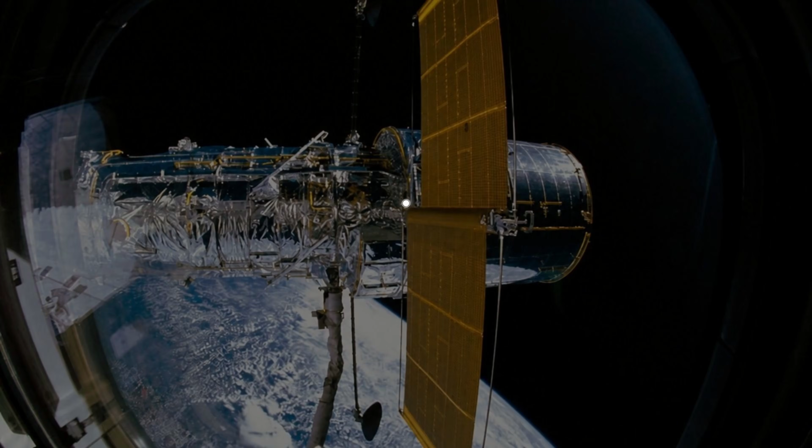In the summer of 1990, the first images came back from the Hubble Space Telescope, and they were blurred. The primary mirror underneath was one of the most precisely polished objects ever manufactured, smoothed to a fraction of a wavelength of light. It was also ground to the wrong shape, off by 2.2 micrometers at the rim, roughly a 50th the width of a human hair.

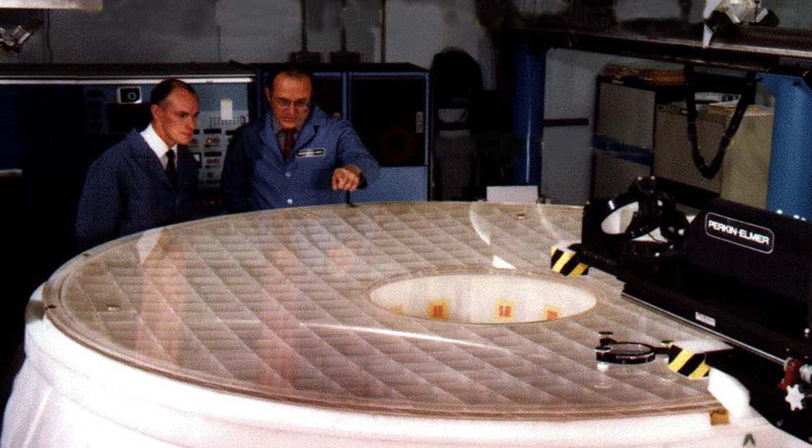But the mirror was not where the failure happened. The instrument built to verify that mirror had been assembled 1.3 millimeters out of position. Every reading it gave was wrong, and the people polishing trusted it completely.

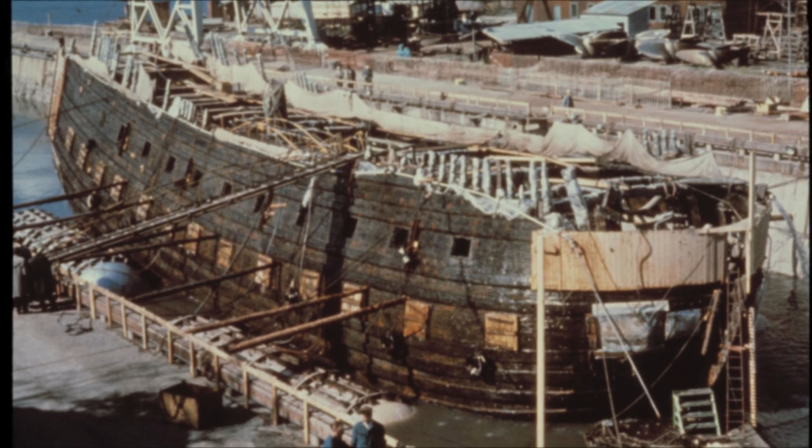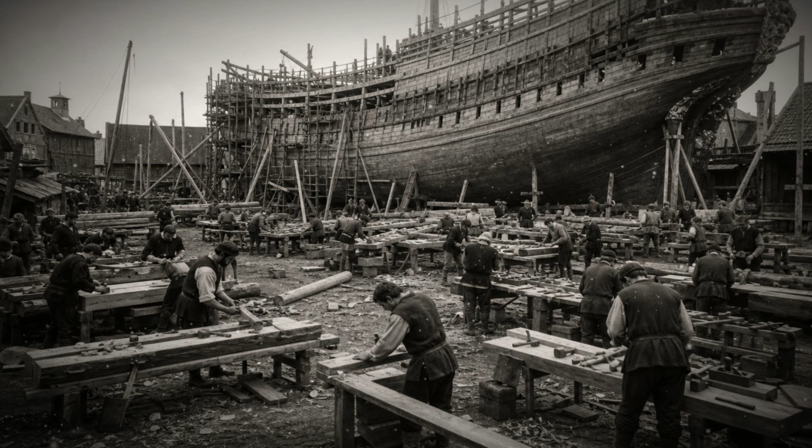When the Vasa was raised and archaeologists finally began measuring her timber by timber, they found a hull that was not symmetrical. The port side and the starboard side did not match. Among the artifacts recovered from the wreck were the carpenters' own folding rulers, and those rulers did not agree. Some were divided into Swedish feet of 12 inches. Others were Amsterdam feet of 11 inches. Men working on opposite sides of the same warship were laying out frames against different definitions of a foot, and neither crew had any way of knowing.

That is the world before tolerance. Not sloppy work. The joinery in the Vasa is superb. It is a world where every craftsman is accurate to his own standard, and no two standards are the same. For most of manufacturing history, that did not matter, because nothing was meant to be swapped.

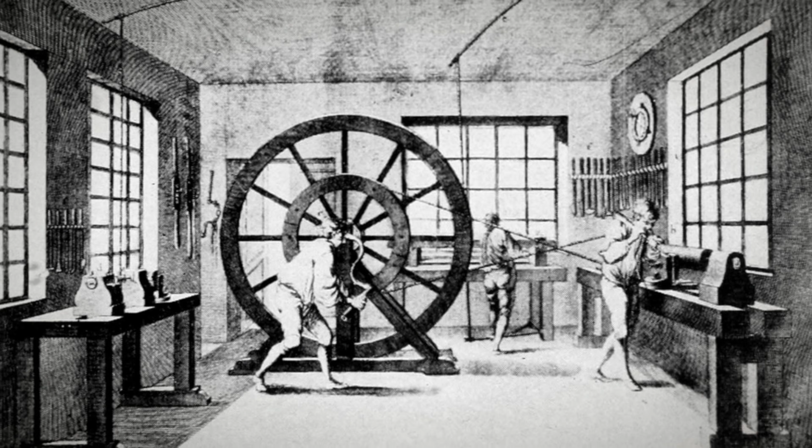A musket lock, a clock movement, a pump, all of it was hand-mated. There was a trade for it. The fitter took the parts as they came off the forge, offered them up to each other, and cut metal until they seated. Every assembly on the bench was unique. The file was the most important tool in the building.

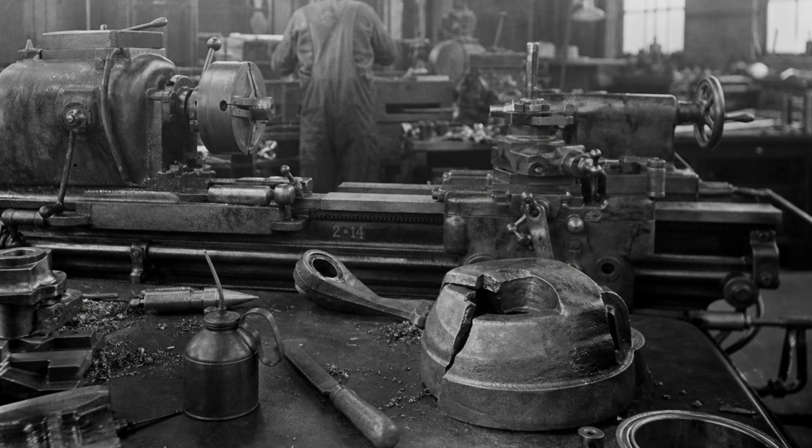As late as the turn of the 20th century, almost every part arriving at an assembly line still needed a file taken to it somewhere. A broken part was a catastrophe. You could not order another one. You sent the machine back to a craftsman who made a new part to suit that machine and no other.

The pressure to break it came from artillery. In 1765, under a royal order, General Jean-Baptiste Vaquette de Gribeauval began standardizing the French artillery train, boring gun tubes to controlled dimensions so that ammunition could be made to a common size and carriages could share components across a battlefield. An army that can only feed each gun its own bespoke shot does not have artillery. It has a collection of individual cannon.

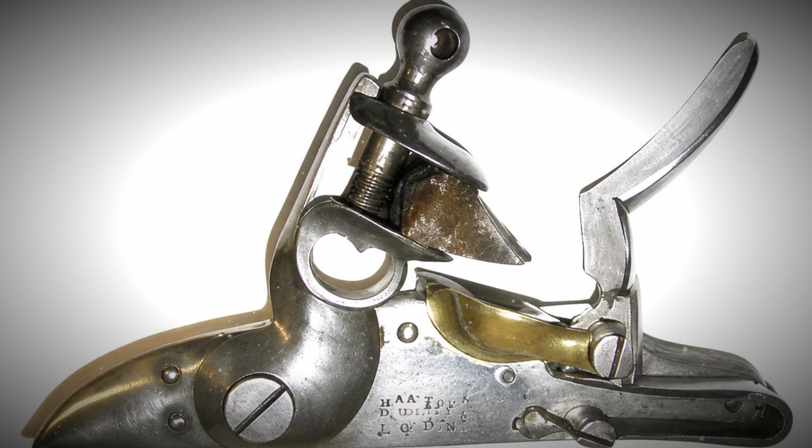The first man to carry that thinking into small arms was a French gunsmith named Honoré Blanc. On July 8, 1785, at the Château de Vincennes outside Paris, Blanc laid out roughly 50 musket locks in front of an assembled group of officials and diplomats. He took them apart. He mixed the components together in bins. Then he pulled parts out at random and built about 25 working locks in front of them. He was working with gauges, filing jigs, and master models, holding parts to a standard rather than to each other.

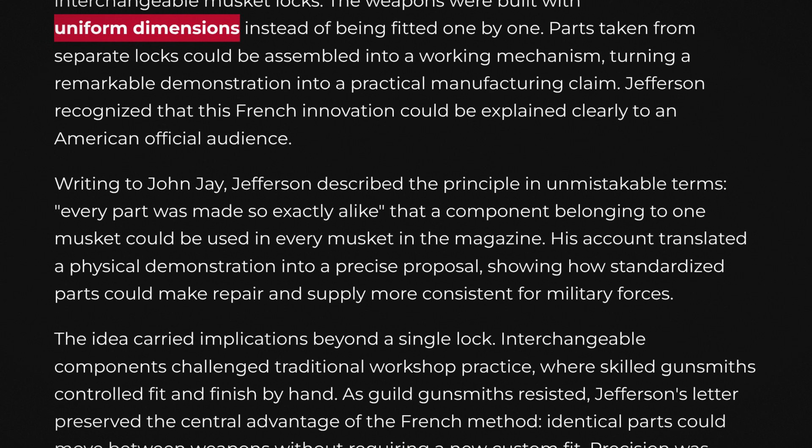One of the men who saw the implications was the American minister to France. Thomas Jefferson wrote back to John Jay, describing an improvement in the construction of muskets in which every part was made so exactly alike that what belonged to one could be used for every musket in the magazine. He noted the advantage plainly. When arms need repair, it is evident. Jefferson did more than admire it. In November 1790, he forwarded a memoir from Blanc directly to Secretary of War Henry Knox, trying to get the method, and the man, transplanted to the United States.

Blanc's own trade destroyed him. The gunsmiths of France understood exactly what a system of gauges and jigs meant for men who made their living by hand-fitting, and they opposed him. The French state let the method lapse. The idea crossed the Atlantic and landed in the American armories, and it took decades longer than anyone promised.

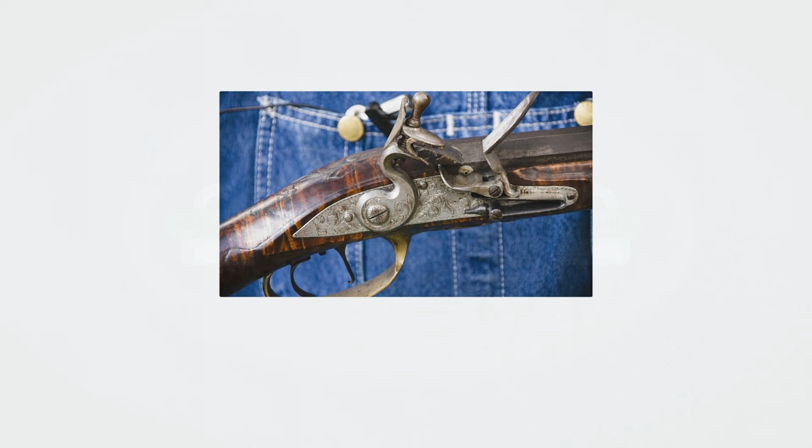Writing to James Monroe in November 1801, Jefferson described a process in which the pieces of a lock were made so exactly equal that 100 locks could be taken apart, their parts mingled, and 100 locks reassembled from whatever came to hand. He also noted in the same letter that Blanc had invented a similar process in France more than a decade earlier, and that the improvements he was describing had not yet been extended beyond the lock.

Eli Whitney signed a contract with the United States government in 1798 to deliver 10,000 muskets. A year in, he had delivered none. The last of them arrived in January 1809, roughly 8 years late. The muskets that survive from his shop carry match marks cut into the parts, the small identifying scratches a fitter uses to keep a specific lock plate with its specific tumbler. You only need match marks when the parts are not interchangeable.

Historians who have gone through the surviving arms and the correspondence, Merritt Roe Smith and Robert Gordon among them, concluded that the demonstration Whitney staged in Washington in 1801 was done with specimens prepared for the occasion. The man who actually did it worked 60 miles up the Potomac.

John Hancock Hall took a contract at Harper's Ferry to manufacture his own breech-loading rifle, the Model 1819, at the Rifle Works on Lower Hall Island. He spent years and more than $150,000 of government money building water-powered machine tools before delivering rifles in quantity, and the armory superintendent regarded him as an expensive eccentric. What Hall was building was not a rifle. It was a system of more than 63 inspection gauges, a physical definition of every critical dimension on the weapon, sitting where any workman could reach it.

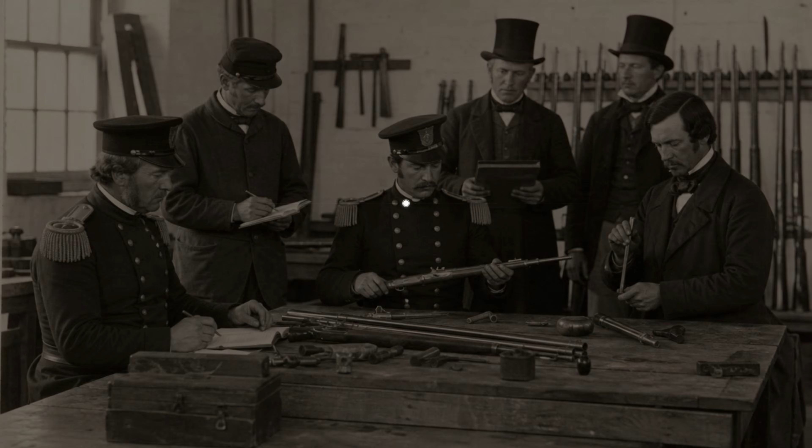In December 1822, Hall wrote to Secretary of War John C. Calhoun that he had succeeded in establishing methods for fabricating arms exactly alike and with economy by the hands of common workmen. In 1826, a government commission tested that claim and confirmed it. Simeon North was building the same rifle at Middletown, Connecticut, and parts from the two factories interchanged. That is the moment. Not one shop achieving consistency, but two manufacturers hundreds of miles apart whose output could be mixed in a crate. Hall did it with gauges because there was no other way.

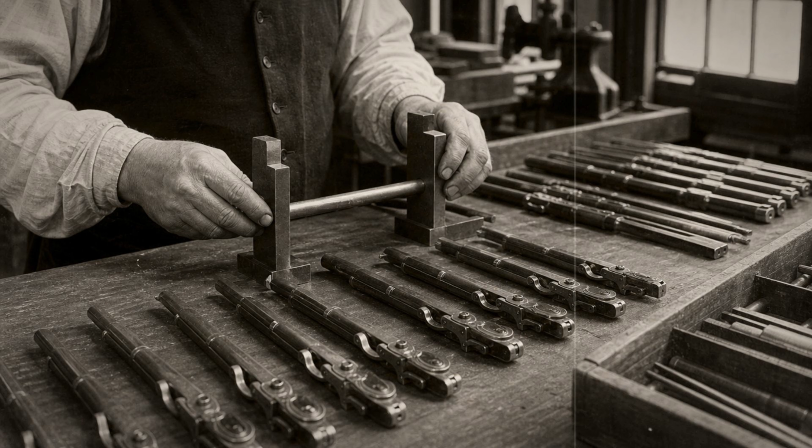And a gauge does something a dimension on a drawing cannot. It does not tell you the size. It tells you whether the part is acceptable. The go gauge must enter. The no-go must not. Between those two objects lies a range of sizes that will work, and the workman does not need to know what that range is. He needs to know the part passed. That is tolerance, embodied in steel before anybody could write it down.

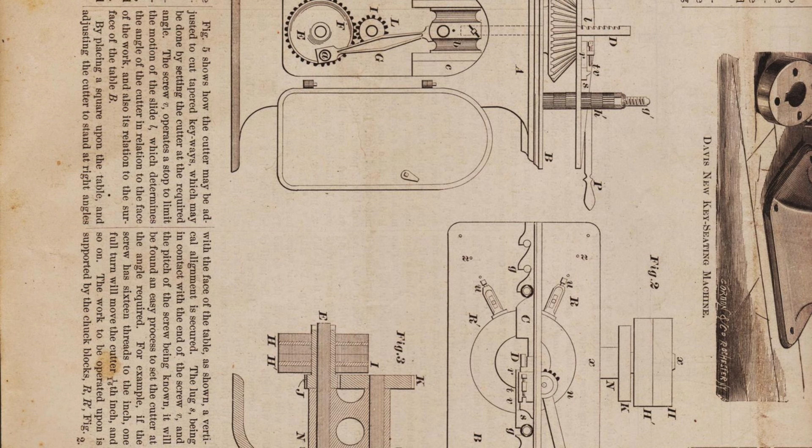Writing it down came slowly. Through the 19th century, a drawing typically carried a nominal dimension and an expectation that the shop would work to it as closely as the shop could manage. The engineer specified perfection, and the fitter delivered whatever the file left him. The knowledge to close that gap existed, but it lived in men rather than on paper. Feeds, speeds, tap drill sizes, which fit to use where, all of it was apprenticeship property, passed down a bench at a time, and guarded because it was the thing that made a tradesman worth hiring. The trade journals pried it loose.

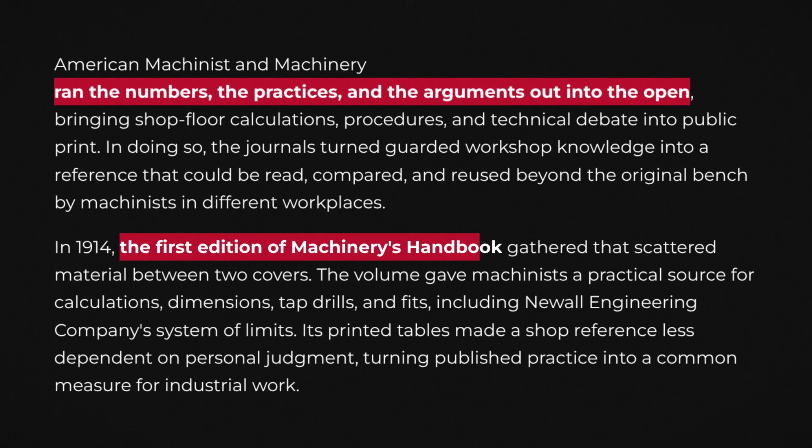American Machinist and Machinery ran the numbers, the practices, and the arguments out into the open, and in 1914, the first edition of Machinery's Handbook collected the lot between two covers. A shop in Ohio and a shop in Glasgow could now look up the same tap drill and get the same answer. Around 1902, the Newall Engineering Company in Britain published a formal system of limits and fits, one of the first attempts to put the permitted range on paper as policy rather than as a note to one workman. Shaft basis, hole basis, running fits, press fits, all of it turning the fitter's judgment into a table.

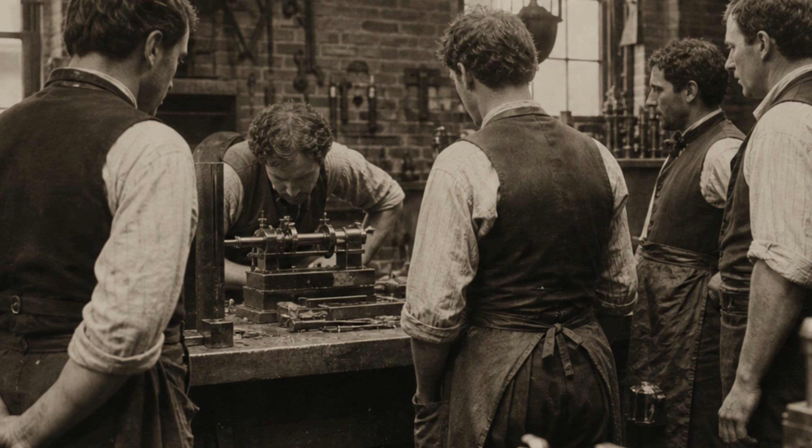But a table of limits is worthless without a physical standard to set your gauges against, and until the end of the 19th century, the physical standards were the problem. Henry Maudslay had built a bench micrometer in his London works that resolved to a 10,000th of an inch, and the men in that shop called it the Lord Chancellor, because when two workmen disagreed about a measurement, its reading was the final court of appeal. That was one instrument in one shop.

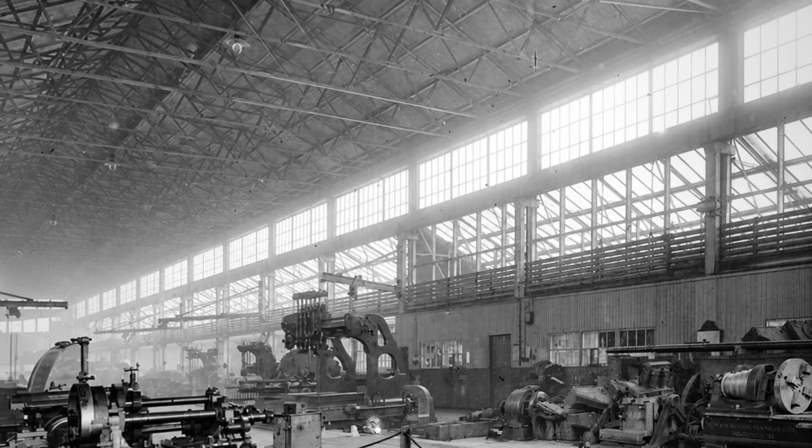Joseph Whitworth, who had served his time under Maudslay, went after the underlying problem. In 1840, he presented a paper on plane metallic surfaces, describing the three-plate method, which is how you produce a true flat when you have no true flat to copy. You cannot lap two plates together and get flatness, because two surfaces will happily wear into a matched convex and concave pair. Bring in a third, work all three against each other in rotation, and the only geometry all three can share is a plane. It is the closest thing engineering has to conjuring accuracy out of nothing, and it is still how scrapers are taught.

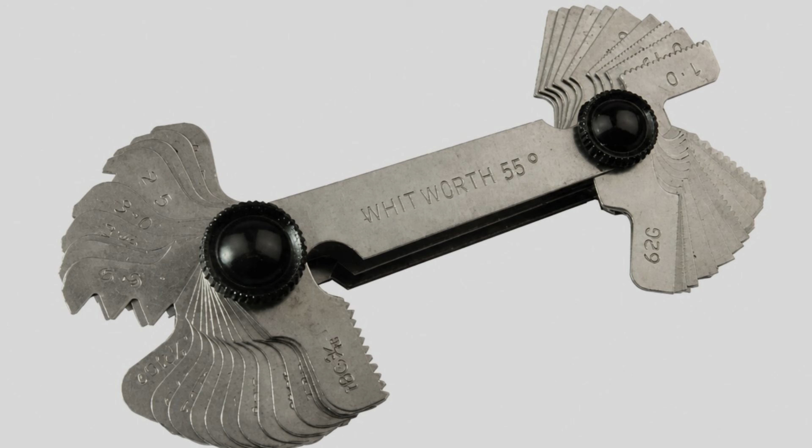In 1841, Whitworth proposed a standard screw thread, a fixed 55-degree included angle with rounded crests and roots and a defined pitch for every diameter, and pushed British industry onto it. By the Great Exhibition of 1851, he was showing a measuring machine that resolved to a millionth of an inch. Then, a Swedish armory inspector took the physical standard out of the laboratory and put it in a wooden box

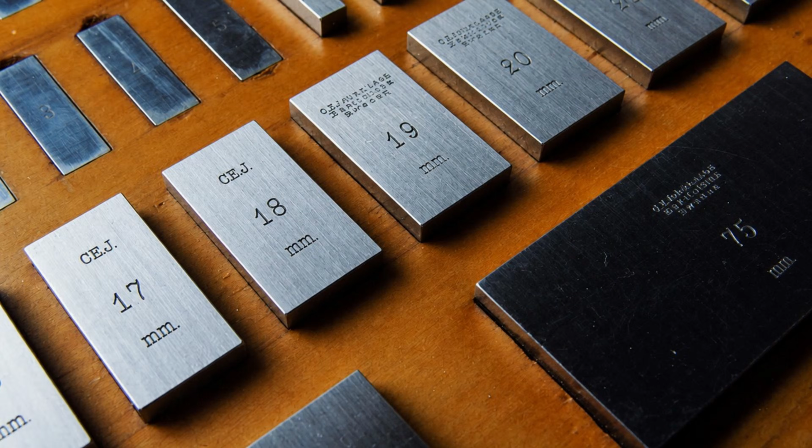on a shop bench. Carl Edvard Johansson worked as an inspector at the Carl Gustaf rifle factory in Eskilstuna. His problem was that setting gauges required a reference, and references were expensive, scarce, and belonged to somebody else. Beginning in 1896, he ground hardened steel blocks to precise lengths, rough cutting at the factory, and doing the finish work at home on his wife's sewing machine, which he had fitted with a grinding wheel. His Swedish patent for gauge block sets was granted on May 2, 1901.

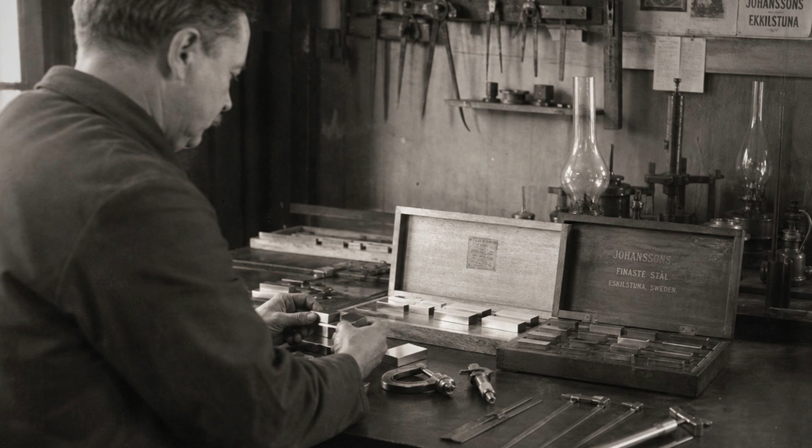What made them extraordinary was not the accuracy alone. The blocks were finished so flat and so smooth that when two were slid together with a light twist, they wrung. They stuck, hard enough to lift a stack by the top block, held by molecular adhesion. That meant a set of 102 blocks running from 0.5 to 300 millimeters in steps of 0.01 millimeters could be combined to build essentially any dimension a shop would ever need, from a box you could carry under one arm. The English patent followed in 1902.

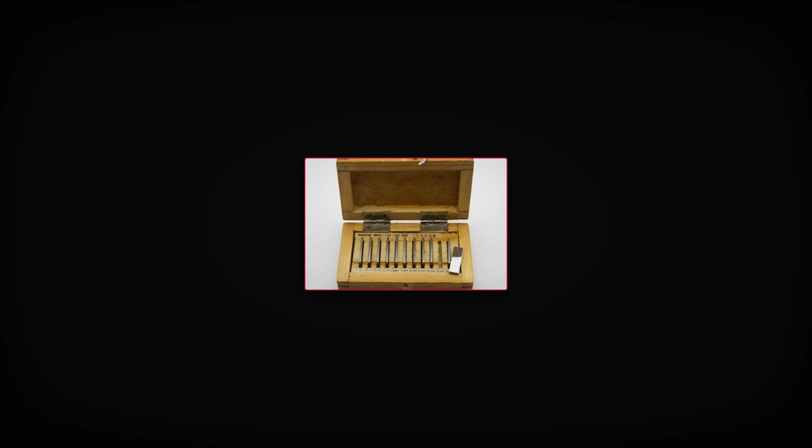What that box changed was not the laboratory. It was the shop. Before it, a firm that wanted to set a go gauge and a no-go gauge sent work out to a national laboratory or a large customer's standards room and waited. After it, a tool room stacked blocks on its own bench, set its own gauges against a length it could prove, and knew that a shop 1,000 miles away stacking blocks from the same system would land on the same

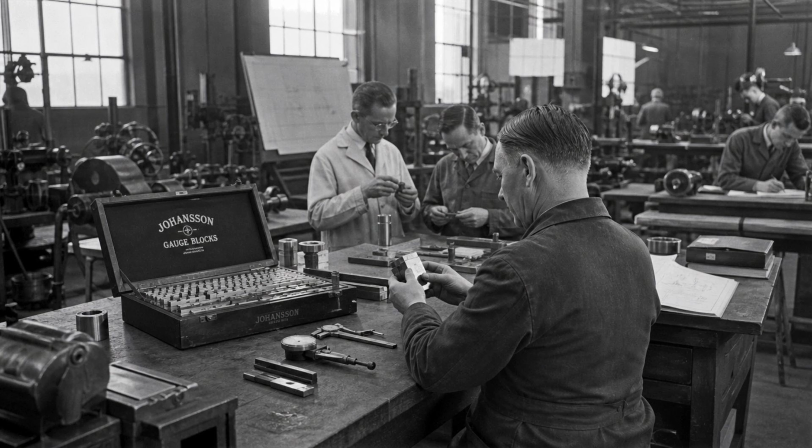number. The first set to reach the United States went to Henry Leland at Cadillac around 1908, and Leland, who had come out of the Springfield Armory tradition and understood exactly what he was holding, said there were only two people he took his hat off to. One was the President of the United States. The other was Mr. Johansson from Sweden. Henry Ford eventually bought the company outright, and Johansson spent 13 years working in Dearborn.

By the 1920s, the tools existed. A shop could hold a size, prove a size, and write the permitted range on a drawing. And the industry promptly discovered that it had solved the wrong problem. Because size is not the only thing that has to be right.

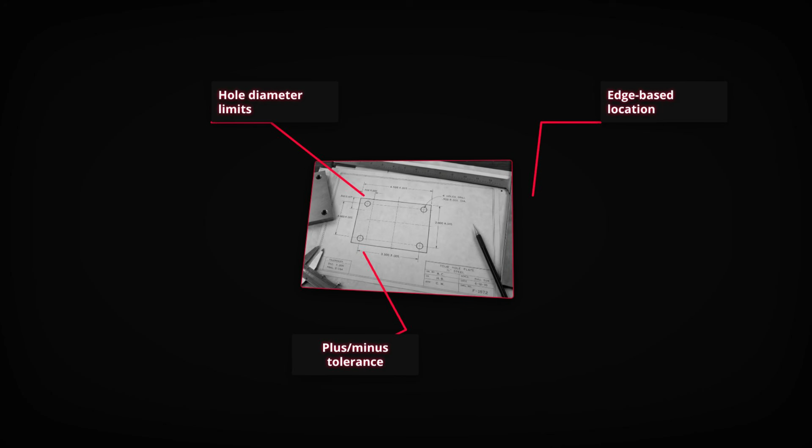Take the simplest case in the trade: a plate with 4 holes in it, and a mating plate with 4 pins. The drawing calls out the hole diameters with limits, and it locates each hole from the edges of the plate with a dimension and a plus or minus tolerance. Half a thou either way in X, half a thou either way in Y. That is coordinate tolerancing, and it is how drawings were dimensioned everywhere. Now think about what that permits.

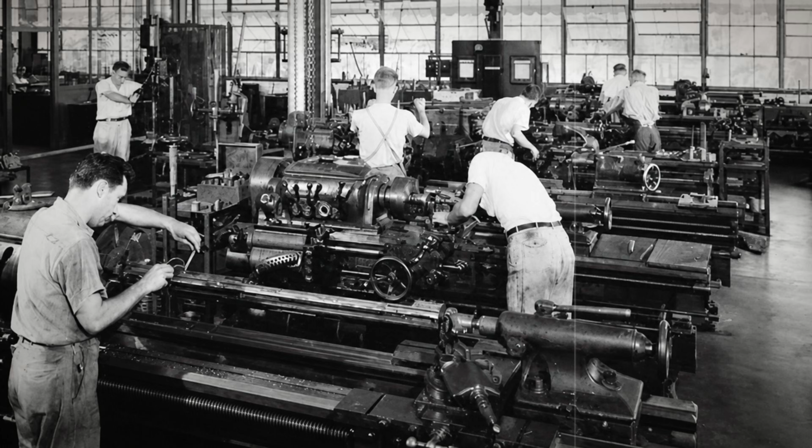A hole 0.0005 high and dead on in X is accepted. A hole 0.0005 high and 0.0005 over in X is also accepted, because both dimensions are inside their limits. But that second hole is farther from where it should be. The zone you have drawn is a square, and the corner of a square is 1.414 times farther from the center than the middle of its side.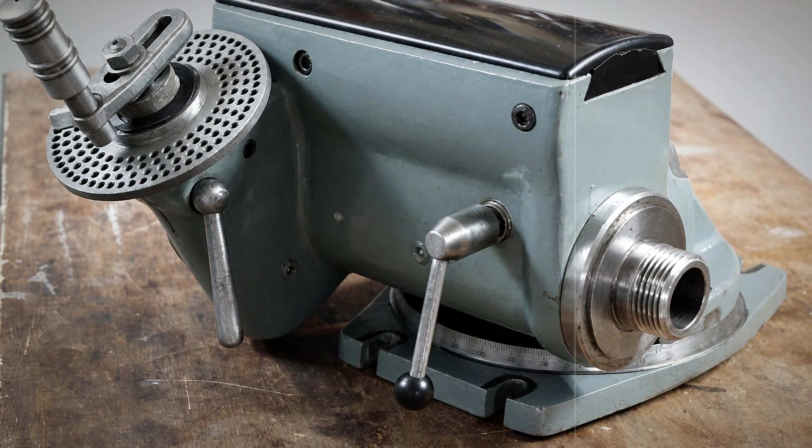The hole does not care about squares. A hole is round, and a pin going into it is round, and what determines whether the thing assembles is the radial distance from where the hole should be to where it is. The square zone accepts parts at the corner that are further out of position than parts it rejects along the axis. Run the numbers on it.

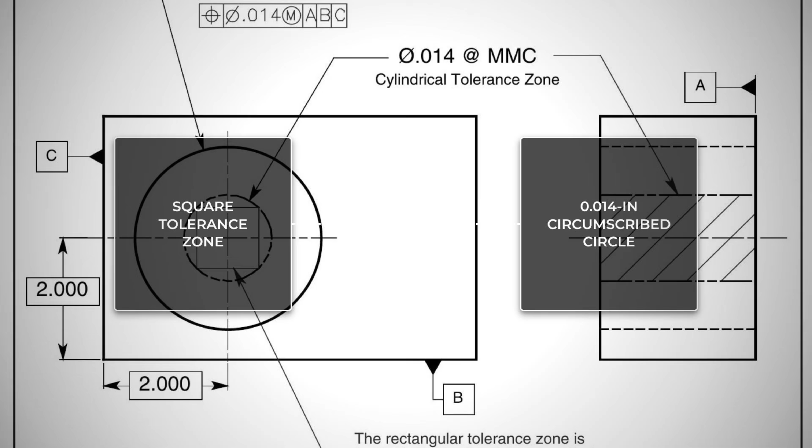A zone of plus or minus 0.005 in both directions is a square 0.010 on a side, with an area of 0.0001 square inches. The circle that contains that square, the one that accepts every part the square accepts, has a diameter of 0.014, and its area is roughly 0.000154 square inches. Same worst-case deviation, about 57% more acceptable parts.

That is the whole argument. Not a looser tolerance. The same functional limit, described with a shape that matches the function instead of a shape that matches the drafting convention. Every part in that extra 57% was a good part, and under coordinate dimensioning it went in the scrap bin or came back through the inspection department for a deviation approval that took a week.

The man who worked that out was a British inspector named Stanley Parker, and the documentary record of him is thin enough to be frustrating.

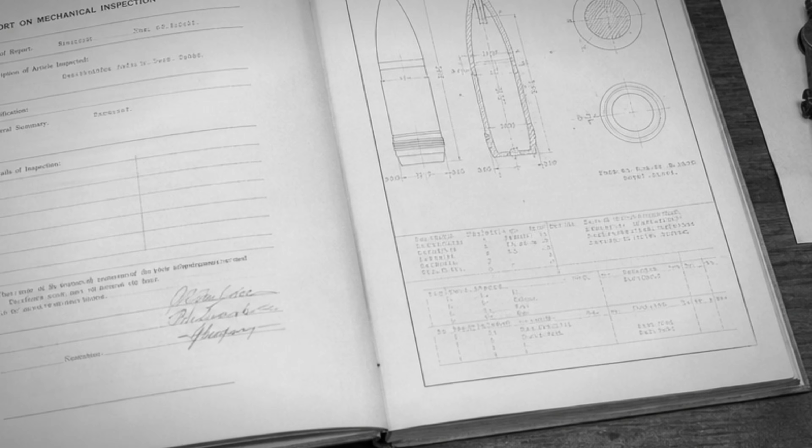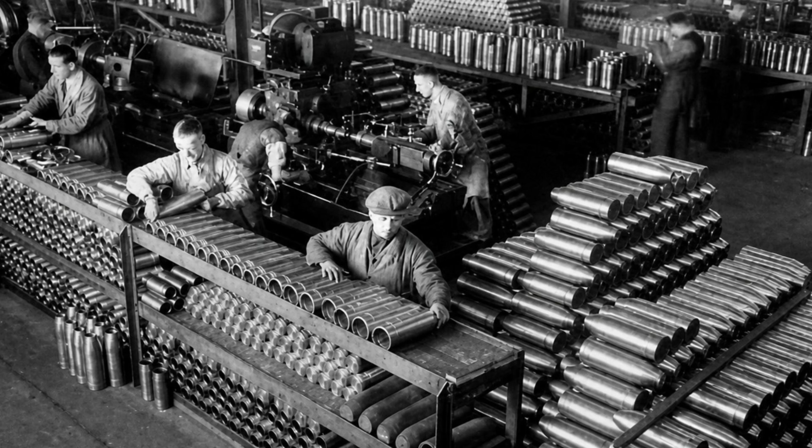What is on paper is this. In 1940, at the Naval Ordnance Inspection Department Gauge Factory in Sheffield, Parker was working on the problem of dimensioning for inspection. His foundational report, Notes on Design and Inspection of Mass Production Engineering Work, was issued that year by the Gauge Design Drawing Office at the Naval Ordnance Gauge Factory in Sheffield, and a copy sits in the National Archives. The problem in front of him was a war problem.

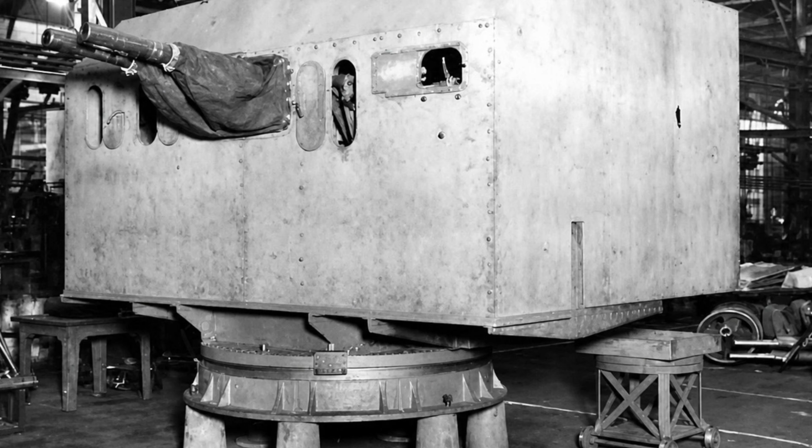The Admiralty needed the production of a naval weapon expanded rapidly across a number of contractors who had never built it, firms with their own shops, their own inspectors, and their own reading of a drawing. Parker's method was applied to redimensioning and retolerancing that weapon's drawings so the work could be spread. When a drawing goes to 6 shops instead of 1, every ambiguity in it becomes 6 different parts.

The work moved up through the machinery of a country at war. In 1942, an Admiralty committee took it on, chaired by F.H. Rolt of the National Physical Laboratory, the metrologist who had met Parker at the Sheffield Gauge Factory 2 years earlier. In 1944, it went wider, to an inter-services committee covering all 3 branches. In 1948, His Majesty's Stationery Office published the result as Dimensional Analysis of Engineering Designs.

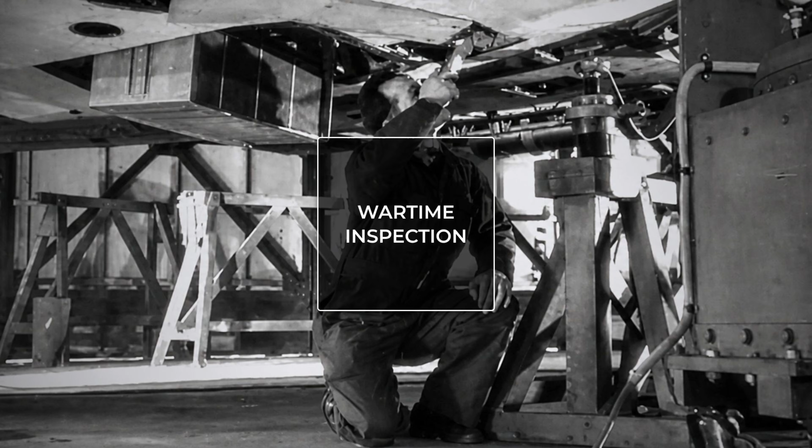From a wartime inspection problem to national policy took 8 years. Parker was awarded the British Empire Medal in 1945. The Admiralty gave him a substantial monetary award in 1950. He sat on the British Standards Institution subcommittee that wrote the 1953 revision of BS 308, the first British drawing standard to carry geometric methods. In 1956, he published a book, Drawings and Dimensions.

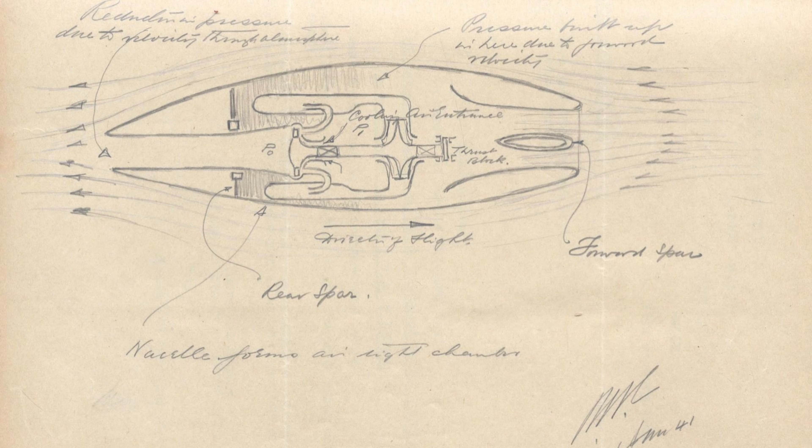And here is the part that gets forgotten. Parker used no symbols, not one. The system was originally written out in words and ordinary notation. The symbols came later from other people, in other countries, and they are what the trade now calls GD and T, geometric dimensioning and tolerancing. The wall of boxed feature control frames in the corner of every modern drawing is the shorthand somebody else invented for what Parker wrote in sentences, which is where it turns into a standards fight.

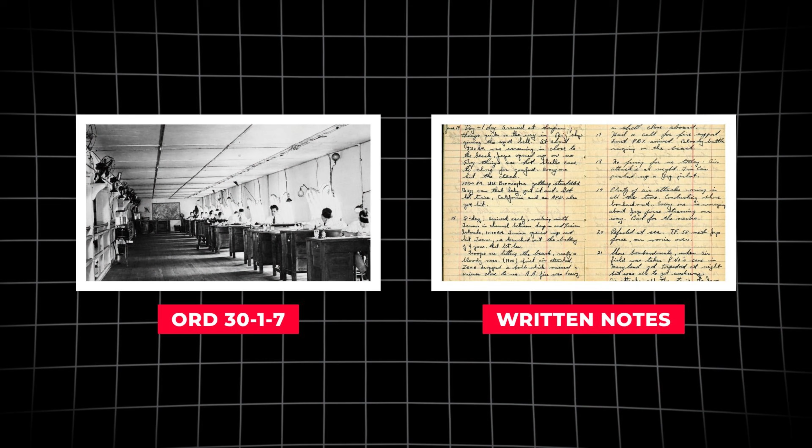The Americans went at the same problem from the manufacturing side. In 1946, United States Army Ordnance issued ORD 30-1-7, which introduced symbols rather than written notes. The Society of Automotive Engineers put out an aeronautical drafting standard the same year. In 1949, the military consolidated it into MIL-STD-8, and in 1953, MIL-STD-8A.

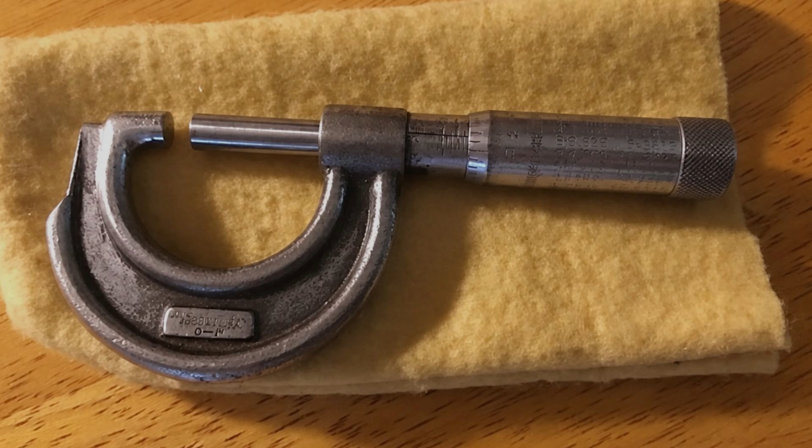MIL-STD-8A codified what the trade now calls Rule 1, the envelope principle. A feature at maximum material condition must have perfect form. If a shaft is at its largest allowed diameter, it has to be straight and round because there is no clearance left to give it anywhere to bend.

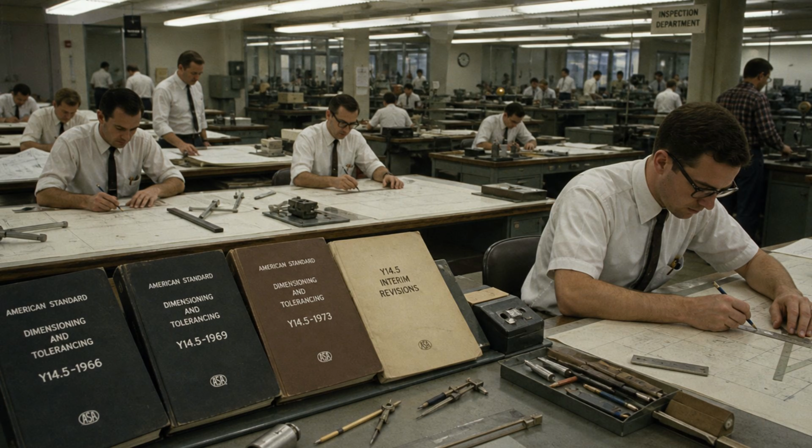The commercial standards followed the military ones. The American Standards Association issued Y14.5 as a dimensioning standard in 1957, revised it in 1966, and the standard was issued under its own designation as ANSI Y14.5 in 1973. ANSI Y14.5M in 1982 is the one most shops treat as the arrival of modern practice. Then 1994, then 2009, then the current 2018 edition.

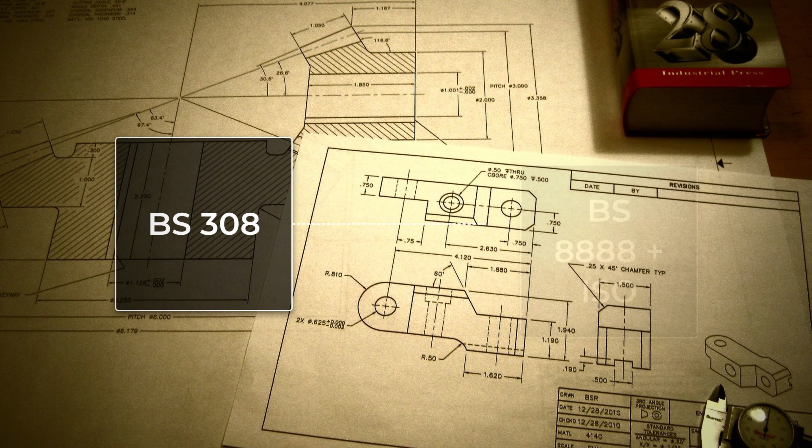In Britain, BS 308 ran through revisions in 1964, 1972, and 1985, before being withdrawn in 2000 in favor of BS 8888 and the ISO system. Internationally, the work went into ISO 1101, which became the reference for geometrical tolerancing outside the American system and is what most of the world's drawings now answer to.

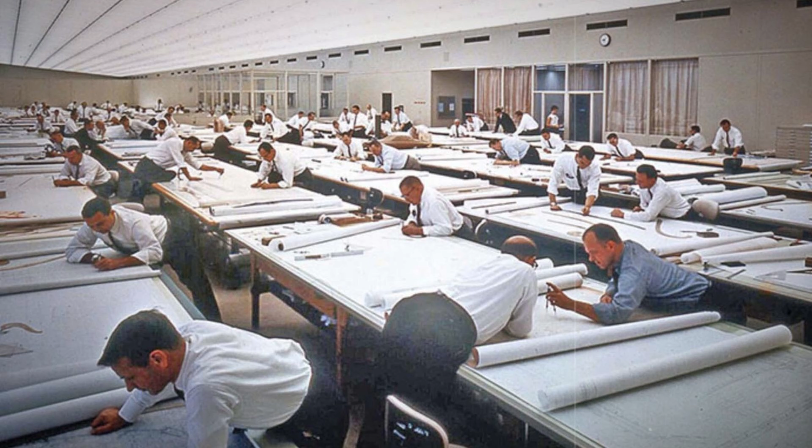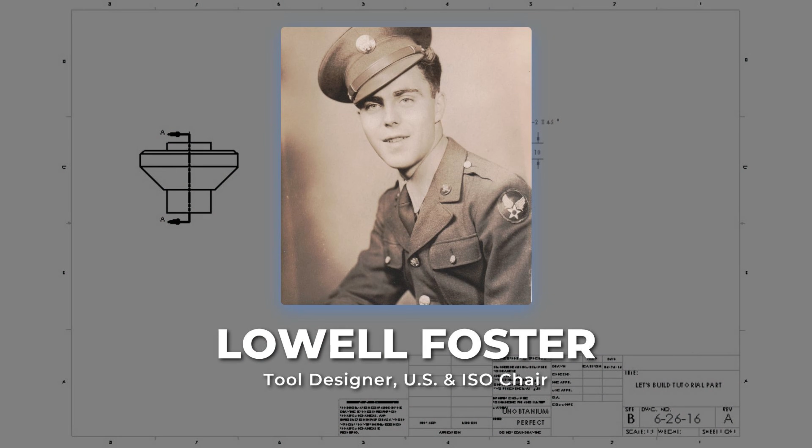Two committees, working the same problem, publishing in parallel for decades. The American who drove it for 45 years was Lowell Foster, a tool designer who ended up chairing both the United States National Committee and the ISO Committee. His geometrics books, first published in 1970, are the reason a generation of American engineers learned the symbols at all.

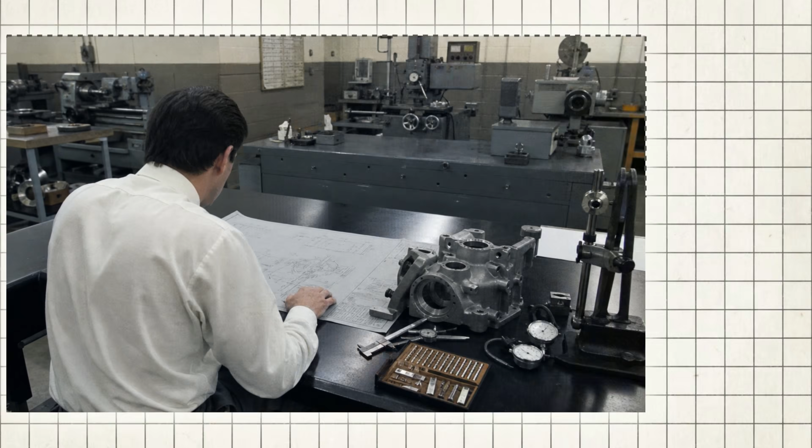But the ISO track and the American track had made a foundational decision differently. ASME kept the envelope principle. ISO worked from the principle of independency, where size and form are separately controlled unless you say otherwise. The same drawing, read in a Detroit inspection room and a Stuttgart inspection room, could produce two different verdicts on the same part. Foster's own position by 1994 was that the systems agreed on the overwhelming majority of cases. Others in the field argued the disagreement ran through a substantial fraction of everything you could specify.

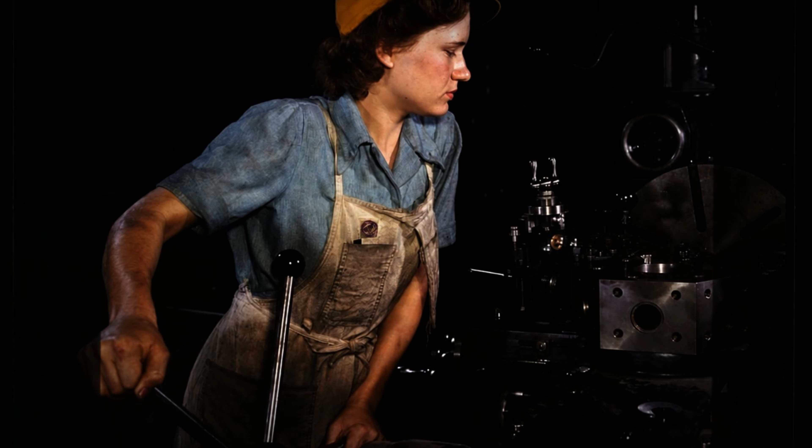And this was not academic because the trade had already learned what a definition mismatch costs in the middle of a war. British industry ran on the Whitworth thread. American industry ran on the American National Form, which came out of the Sellers system. Whitworth used a 55-degree included angle with rounded crests and roots. The American form used 60 degrees with flat crests. Even where the pitches nearly agreed, they did not agree.

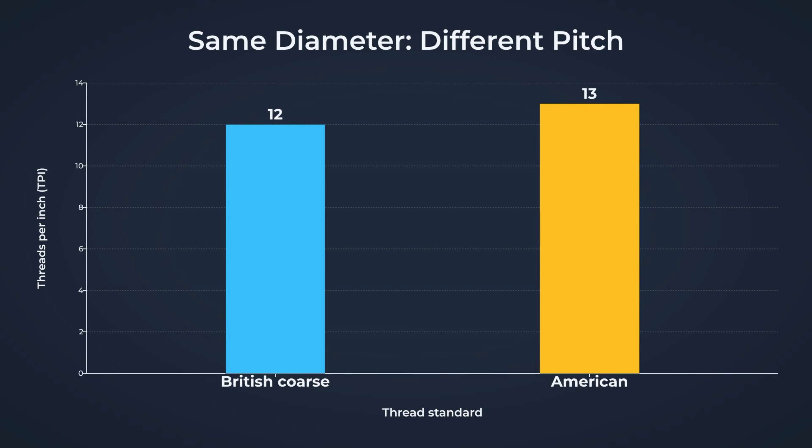At half an inch diameter, the British coarse thread was 12 threads per inch, and the American was 13. Now put two Allied armies in the same theater, sharing depots and repairing each other's equipment. When Packard built the Rolls-Royce Merlin under license in the United States, the fastener question alone consumed serious time because Packard's shops worked in Sellers threads and the drawings did not.

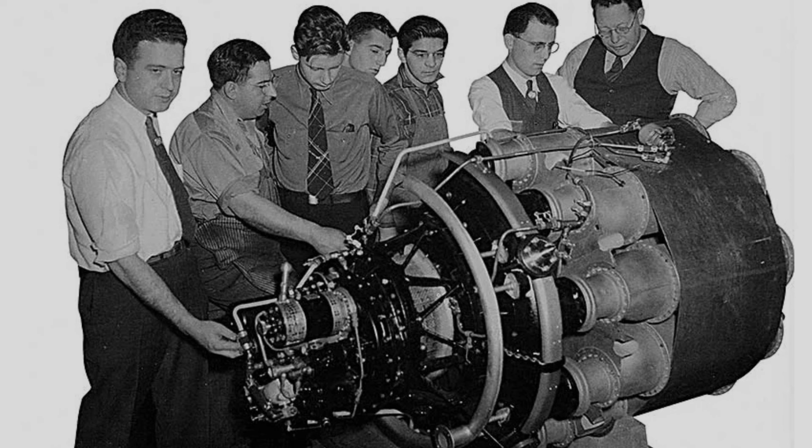A bolt is the cheapest thing on an aircraft. It is also the thing that stops one flying when the only bolt in the crate will not start in the hole. The fix took until November 1948, when the United States, Britain, and Canada agreed the unified thread standard. The British accepted the 60-degree angle. The Americans accepted rounded roots. Both sides gave up something they had built an industry around, because the alternative had already been demonstrated.

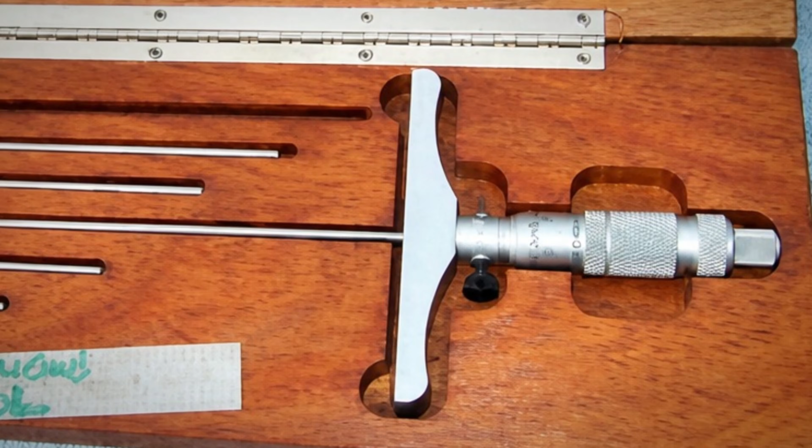Which brings us to the second half of the problem Parker opened, and the one that causes more argument on a shop floor than position tolerance ever has. Where do you measure from? A part has 6 degrees of freedom. It can translate along 3 axes and rotate about 3 axes, and until you take all 6 away, it is not sitting anywhere in particular. The way you take them away is with datums, in a specific order.

The primary datum surface goes down on the plate and locks 3 degrees, 1 translation and 2 rotations. The secondary takes 2 more. The tertiary takes the last one. Prime the part against 3, then 2, then 1, and there is exactly 1 way it can sit, and every inspector who follows the drawing gets the same answer.

Before that was written into drawings, reference surfaces were implied. The dimension came off an edge, and which edge, and in what order, and how the part was clamped while it was measured, all of that lived in the head of whoever was doing the work. 2 competent inspectors, working from the same drawing, with calibrated instruments, in good faith, could measure the same part and disagree. Not because either was wrong, because the drawing never said what the part should be measured from.

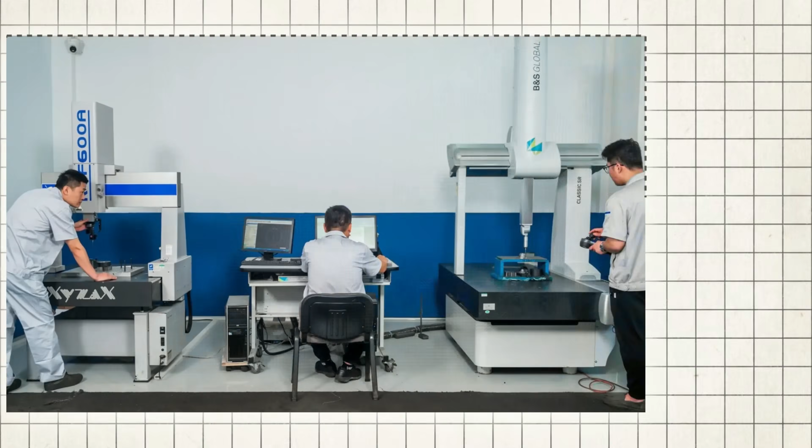The practical version happens every week. A machined casting comes in with a rough face and 3 finished pads. One inspector sets it on the pads because that is how it bolts down in service. The other sets it on the largest flat area because that is what the surface plate wants. The part passes on one bench and fails on the other, and 2 companies spend a fortnight arguing about a part that was correct the whole time. The datum call-out is the sentence that ends that argument before it starts.

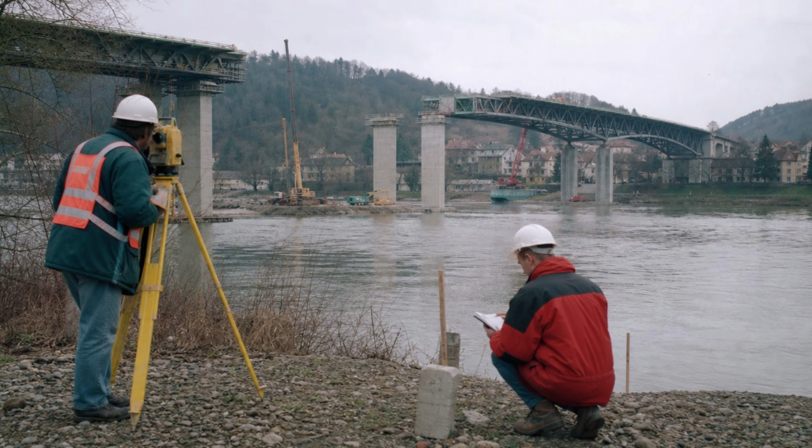If you want to know what an unstated reference is worth, look at what happened in the Rhine. In the early 2000s, German and Swiss crews were building a bridge across the High Rhine at Laufenburg, working toward each other from opposite banks. Germany references elevation to the North Sea. Switzerland references the Mediterranean. The 0 points of those two national height systems differ by 27 centimeters, and both engineering teams knew it. The correction was calculated and applied.

It was applied with the wrong sign. Instead of canceling the 27-centimeter difference, the correction doubled it. The two halves were being built toward a meeting point 54 centimeters apart in elevation, and nobody found it until the spans came close enough over the water to compare. The German side had to be brought down. Nobody was hurt. No instrument was out of calibration. Every measurement taken on that project was accurate. They were accurate to two different definitions of 0.

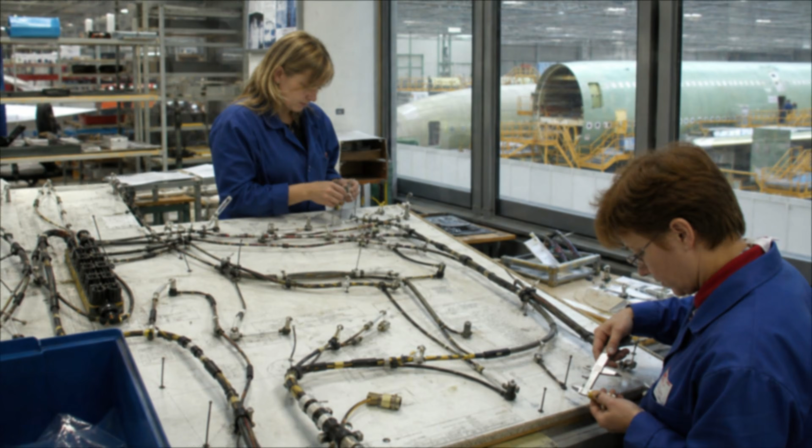The modern version of the same failure runs through a computer. In 2006, Airbus was assembling the A380 from major sections built across 4 countries. The wiring is the nervous system of that aircraft. Roughly 530 kilometers of wire, more than 100,000 individual wires, and around 40,300 connectors carrying over 1,100 separate functions. All of it bundled into harnesses that have to be manufactured to length and then threaded through an airframe assembled somewhere else. The design offices in Germany and Spain were working in CATIA version 4. France and Britain had moved to version 5.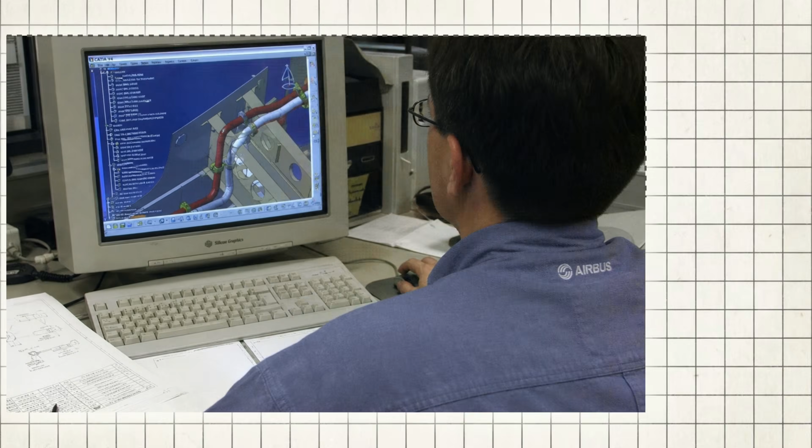The two versions did not calculate the geometry of a bent cable the same way, and a wire routed through a 3-dimensional airframe accumulates that difference over every bend. The harnesses came out too short. Not by a margin anybody could stretch out on the floor. Thousands of them, in an aircraft with no room to reroute. The airframes were correct. The wiring was manufactured correctly to the model it came from. The models did not agree. Airbus's parent company told investors the delays would take 4.8 billion euros off profits over 4 years. The chief executive resigned. The first aircraft went to Singapore Airlines in October 2007, roughly 2 years behind schedule.

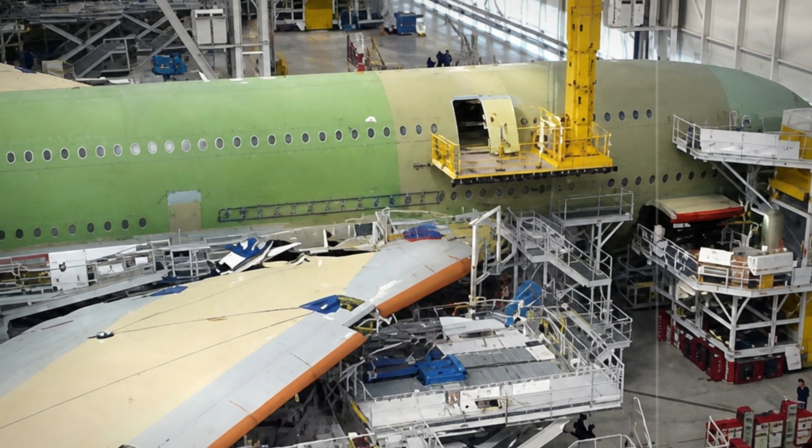And in 1999, the definition problem reached Mars. The ground software supplying thruster performance data to the Mars Climate Orbiter navigation team produced its figures in pound-force seconds. The navigation software consuming those figures expected Newton seconds. The two units differ by a factor of about 4.45, so every trajectory correction the team calculated was based on a number that was wrong by the same ratio, consistently, all the way from Earth.

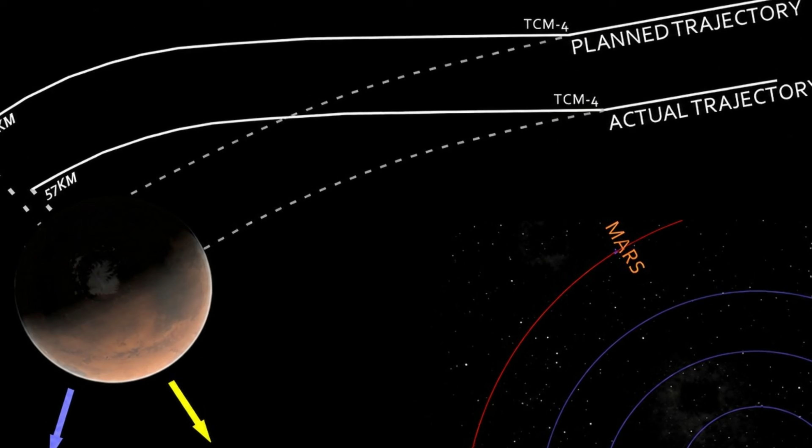A correction on September 15th was intended to put the spacecraft at an arrival altitude of about 226 kilometers. It arrived at roughly 57 kilometers, well below the altitude the structure could survive, and was destroyed on September 23rd. The mission cost $327.6 million, of which about $125 million was the orbiter itself.

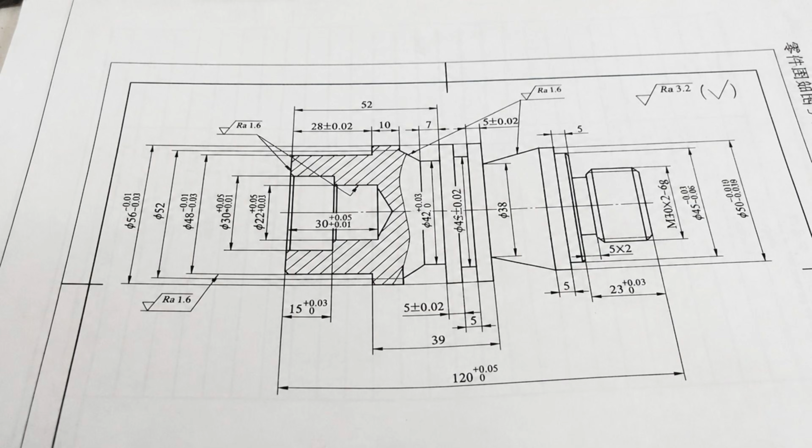Every one of these is the same failure. Laufenburg, the A380, the Mars orbiter, and the Vasa, 375 years earlier. Nobody was careless. In all of them, two groups of competent people worked accurately to definitions that did not match, and nothing in the process was designed to catch the disagreement. Which is the entire point of what the standards committees built.

A tolerance is not permission to be sloppy. It is a contract. It says, here is the nominal. Here is the acceptable variation from it. Here is the geometry of the zone that variation lives in. And here is the reference frame the whole thing is measured from. Once all 4 of those are on the drawing, the shop and the customer are arguing about a part instead of arguing about what the drawing meant. And the system pays the shop back for its honesty.

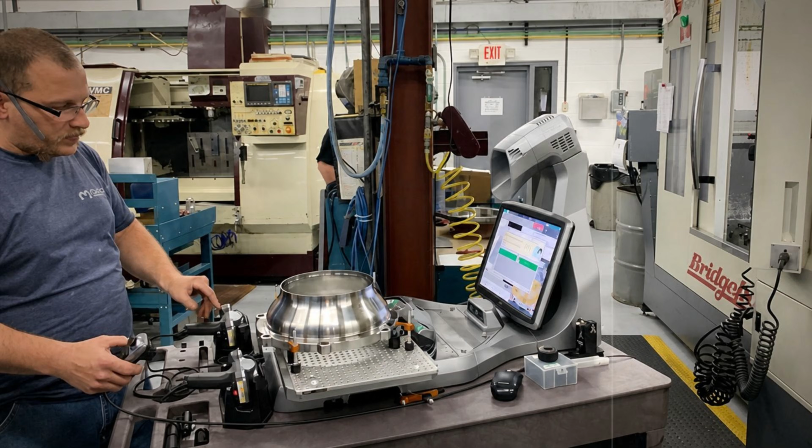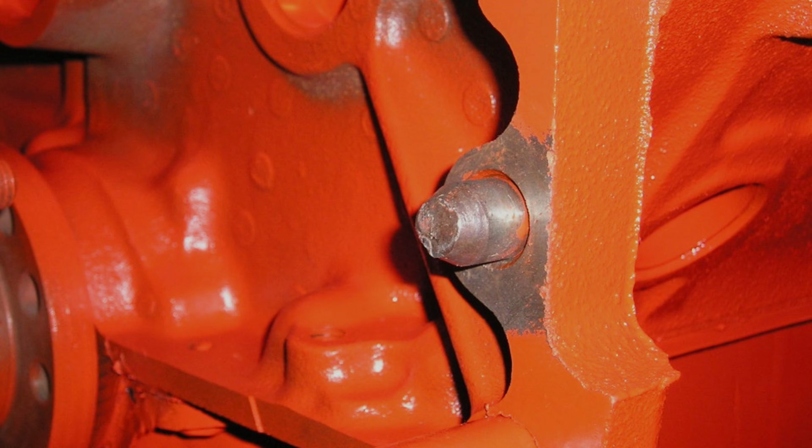Take a hole with a permitted range from 0.500 to 0.510, positioned within a zone of 0.010 at maximum material condition. Maximum material is the condition where there is the most metal left, which for a hole is its smallest size. Drill it at 0.500 and you get the 0.010 you were given. Drill it at 0.506 and the hole has 0.006 more clearance in it than the drawing assumed, and that clearance is real. A larger hole will swallow more misalignment from the pin going into it, so the extra 0.006 is added to the position tolerance as bonus, and the zone becomes 0.016.

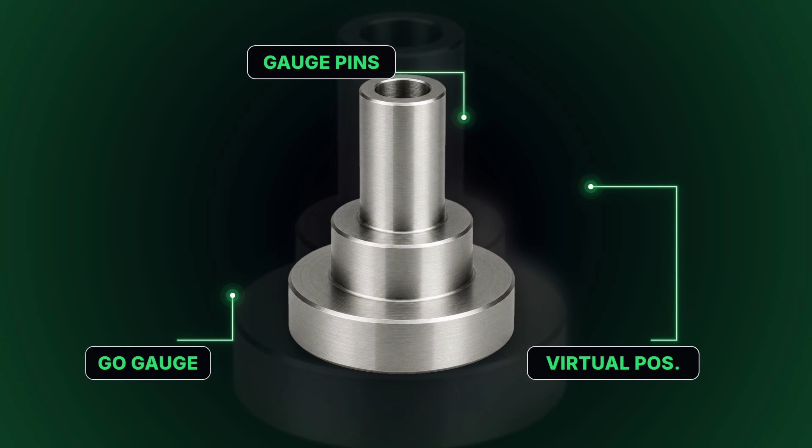Nothing was given away. The drawing hands back as much freedom as the assembly can physically absorb, and not a tenth more, because the geometry of the fit is doing the arithmetic instead of a draftsman guessing. And all of it can be checked with a fixed functional gauge, a piece of hardened steel with pins standing at the virtual condition positions. The part drops on, or it does not. No interpretation, no argument, no inspector's judgment on a Friday afternoon. That is Hall's go gauge, 200 years on, with the geometry finally written down.

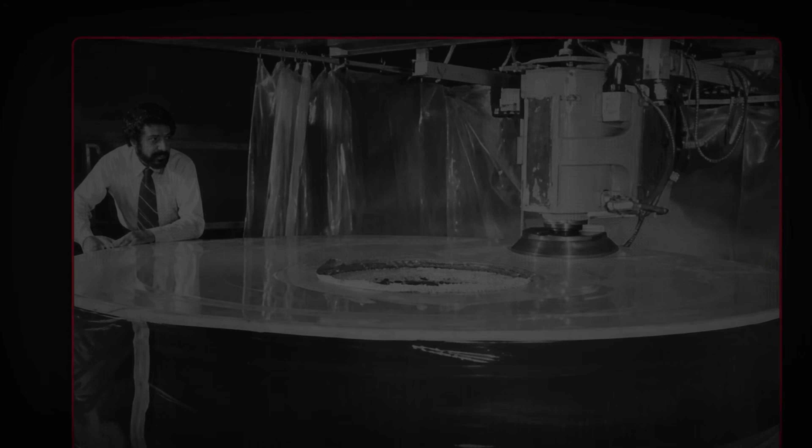Which brings us back to a mirror. The Hubble primary was polished against a reflective null corrector, a device whose whole purpose was to define the correct optical shape. During its assembly, a technician set the spacing of a lens using a laser reflected off the end of a metering rod. The laser landed on a chipped spot of paint on the rod's end cap rather than the rod's actual end surface. The lens ended up 1.3 millimeters out of position. The consequence of that specific 1.3 millimeters accounts, in full, for the aberration measured in orbit.

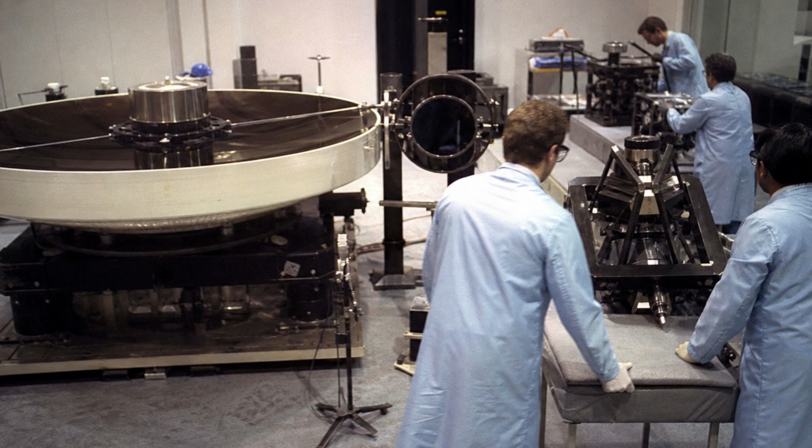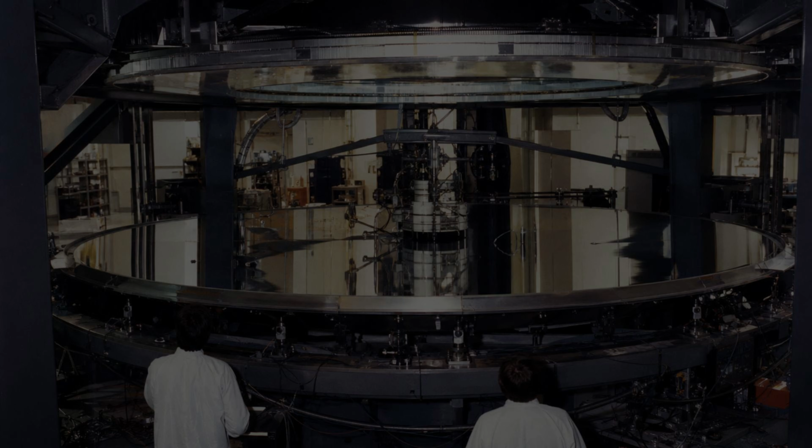The Government Accountability Office put the expected cost of the telescope at more than $1.5 billion. 2 other test devices flagged the problem before launch. An inverse null corrector and a refractive null corrector both showed a discrepancy. Both were set aside because the reflective null corrector was the more accurate instrument and the team trusted the more accurate instrument. That is the failure. A correct measurement taken faithfully against a reference that nobody had verified by people who had every reason to believe it. The mirror was polished to superb accuracy. It was accurate to the wrong definition of correct.

It took the Space Shuttle Endeavour and 5 spacewalks in December 1993 to install corrective optics and fix it. And the fix worked because engineers on the ground could describe the exact shape of the error to a precision that let them grind glass to cancel it.

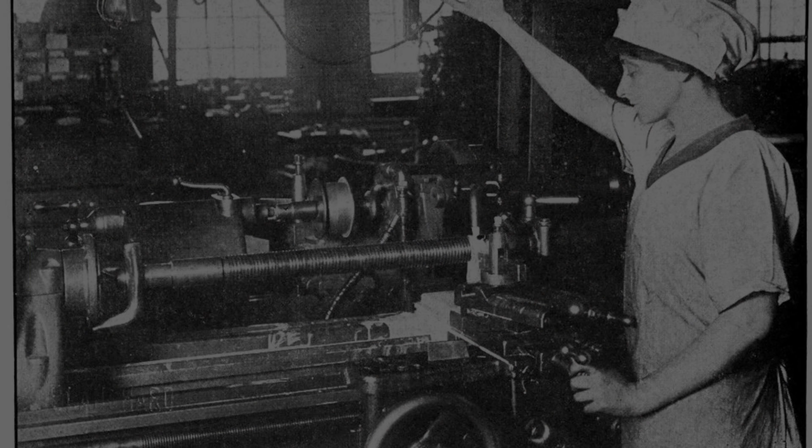The whole history of tolerance is the history of one question that will not go away. Not how accurately can we make this. We got very good at that a long time ago. The question is, how do 2 people in 2 buildings holding 2 instruments prove they are talking about the same thing? The next time you look at a feature control frame and think it is bureaucracy, remember that everything in that box exists because somebody, somewhere, made a perfect part that did not fit.